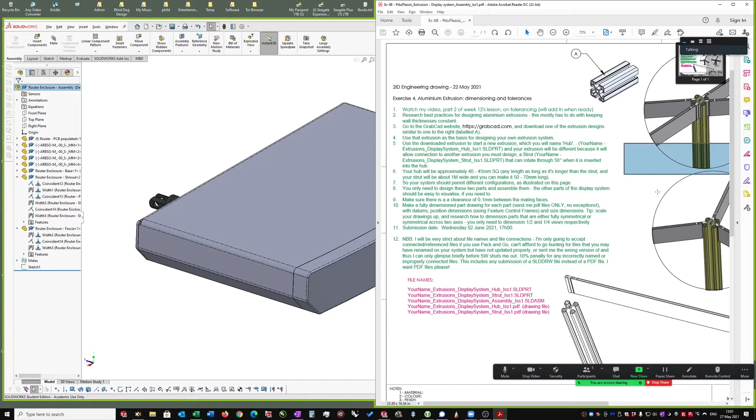In essence, what I'm asking you to do is shown in these 4 illustrations. Let's zoom in. It's essentially an extrusion which is going to look like this, similar to the one you've got but a bit simpler. And then another longer extrusion of about 1 meter, which looks like this long one here.

I want that round end to slide inside this round end, or round depression, in the 4-cornered extrusion, and then be able to rotate from left to right by 50 degrees. So we're designing the meter-long piece, right, and the extrusion is the one we get from GrabCAD?

No, you're designing them both. I'm confused as to which part we're getting from GrabCAD. Well, you're going to go and grab something like this - you don't have to, you can ignore it if you want. It's just easier, I thought, to grab an existing extrusion. It's almost the same size as what I'm looking for, and it's got the basic arrangement.

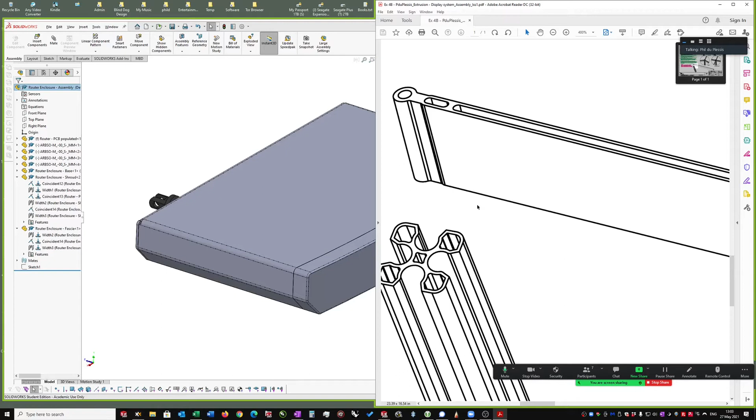You can then use that to grab a sketch off the end of this piece and use that sketch to create the sketch for this extrusion, because extrusions are just basically flat sketches extruded - there's no modeling to them, they're just sketches which you extrude. Do you understand what I'm getting at?

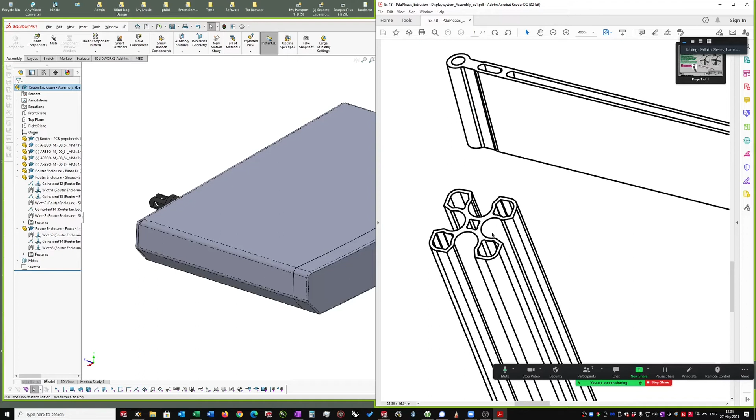Yes, that makes a lot more sense. So we can make them whatever shape we want if we don't get them off GrabCAD? Yeah, kind of, except I want this to be radially symmetrical. I'm going to want these pieces to do what I've asked for in these illustrations.

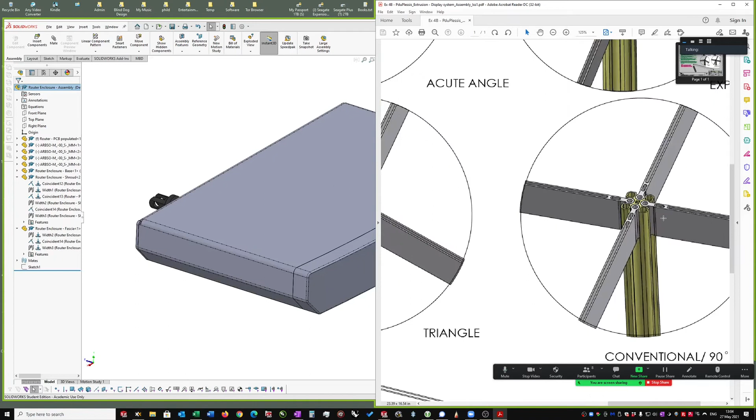I don't know if you can see this first illustration here. I'm going to want these pieces to be able to be arranged in an acute angle arrangement, a 90-degree angle arrangement, a triangular arrangement in which you leave one of them out, or anything in between those 3.

So I'm setting a bit of a challenge for you, instead of just slotting extrusions into a straight extrusion. It's sort of like a hinge. Yep, it's a hinge. But it's giving you options.

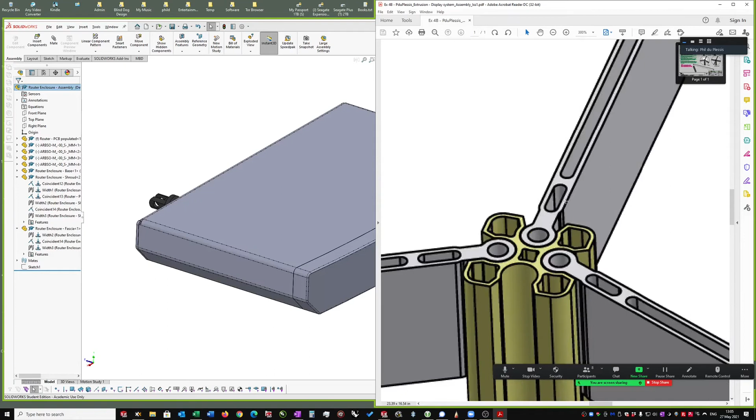What this would have is you'd have injection molded caps, or some sort of cap which you'd insert in this place, which would lock everything into place, top and bottom. Then you'd be able to insert your screen into those slots. I haven't visualized the whole system because I don't see why I should, and because I only want you to deal with those 2 pieces. That's it.

And then obviously I want you to apply the tolerancing procedures that I outlined in my latest video. Okay.

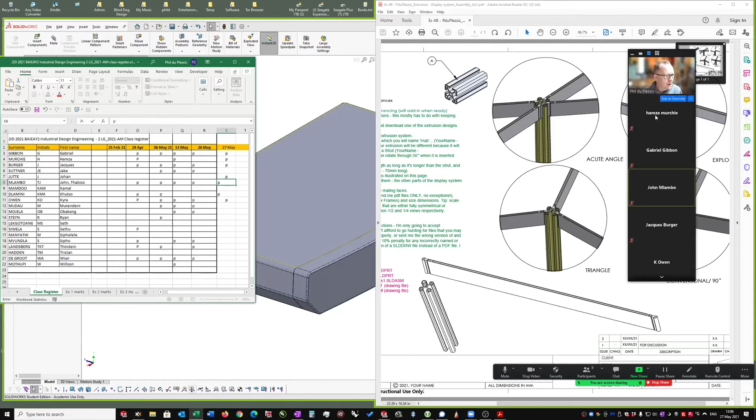Any other questions about this brief?

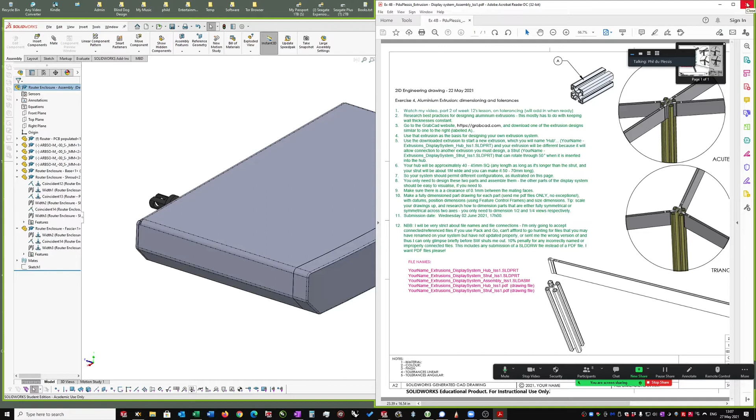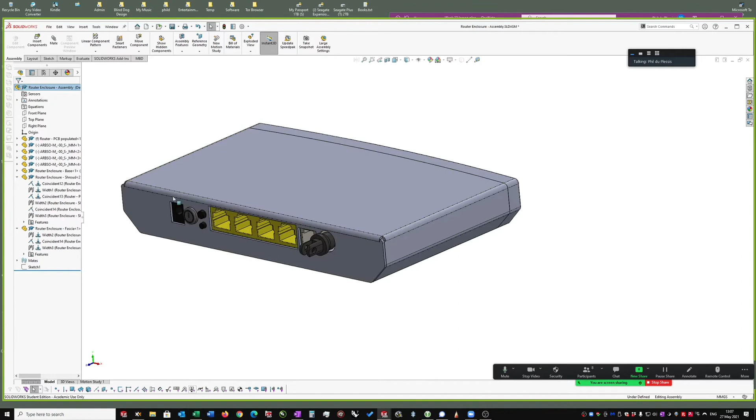Okay, so we're going to be dealing with sheet metal today, and this is essentially what you're going to be designing for me for your last project. Next week is our last session together, so between this week and next week, I have to teach you everything I can on sheet metal that's relevant to this project. Don't worry, we're not going to start with this, we're going to start with something simpler. Let me just maximize.

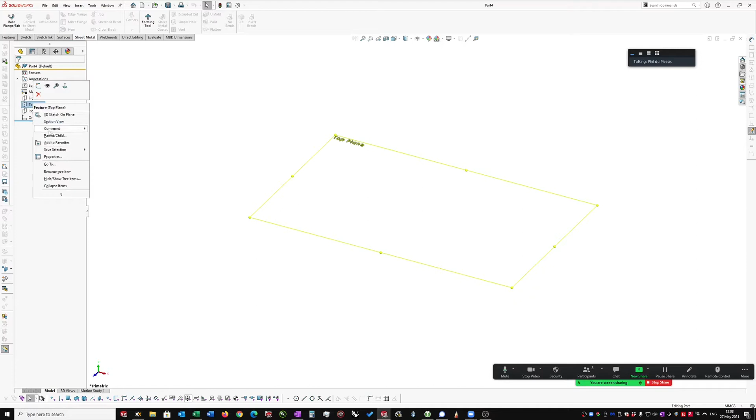Paper aeroplanes, okay. So I'm going to start from the beginning and just assume you guys can stop me if it's too basic. Just stop me. So I'm going to start with a sketch on the top plane, and I'm going to try and keep this very, very simple in the beginning, just because it's going to get a bit more complicated as we go along.

So I'm going to start just with a square. Let's make it 100 by 100, and then exit that.

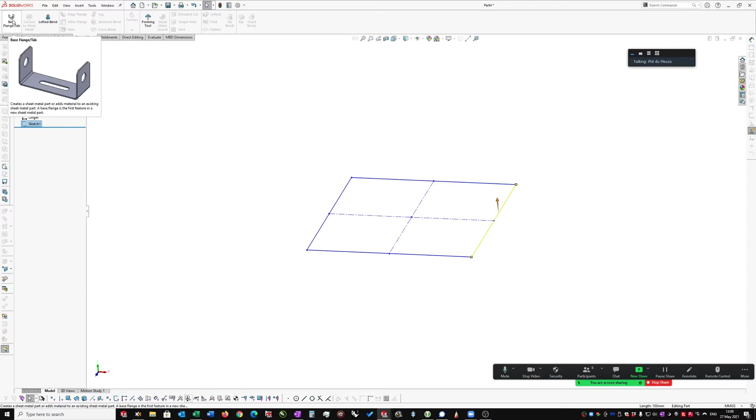Okay, so this is the very most basic approach to sheet metal. There are other approaches, we'll go through them in a while. So I'm in my sheet metal tab, and you'll see across the top that there's the base tab, which is what you always start with, unless you're doing something else, which I'll get to in a moment. And then the second one you use, hidden at the moment, is edge flange.

So base flange, if you click on this tab, you'll get on the left hand side a number of options. One, you can use a gauge table. I'm not going to go through that now, but just be aware that there are tables available. If I click down here and say bend allowance millimeter sample, you can actually set up your own table and go and select your gauge from that. Gauge just means how thick the thing is, so gauge is one of those words which, like a 1 millimeter gauge, isn't actually 1 millimeter, it's 0.97 or something. So instead of using the gauge table, I'm going to type in the thickness, here I'll type in 1.1.

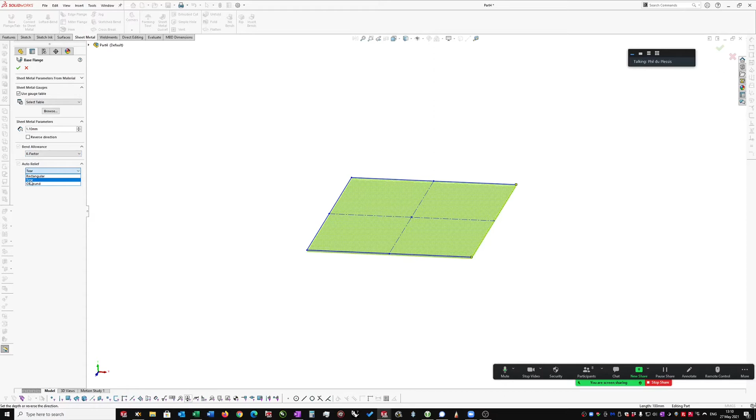You can reverse direction as always. And then these other things, K factor, I'll explain in another video, but it's essentially a way of figuring out how the bend is going to work. And then relief, you've got three kinds: rectangular, tear, and Obround. I'm going to leave it at tear at the moment and click OK.

Right, so basically we've got a piece of sheet metal at the moment, just a very square one. From here we can put in edge, basically it's going to be edge flanges. So this command over here, I've got it in a set of commands, I like to have it over here.

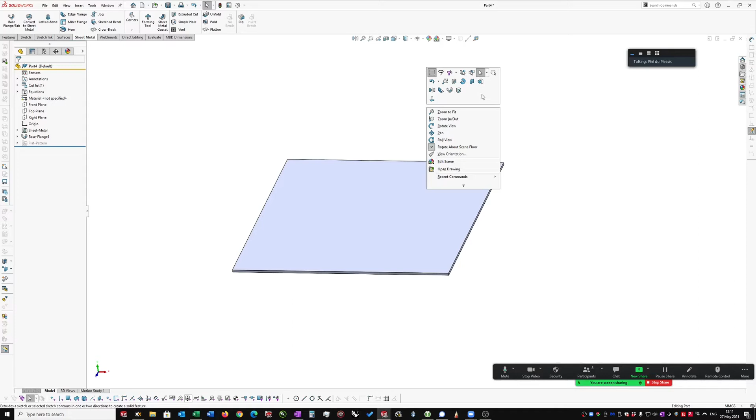I also like to put it, because I use it a lot, in this pop-up. So I'm going to go to edge flange, and from here I can select as many edges as I want, and I can drag up. So once I've dragged one up, I can select another one, and another one, and another one, or I can leave one out. You should be able to see in this little tab on the left, you can right click and delete any one of those. So let's just leave it as 3 for now.

Then a few things to know on the left hand side, let's go through these one by one. Here I've got this use default radius. Now the default radius normally follows the same as the thickness of the object. So if I've got a thickness of 1.1, you can see it's defaulted to 1.1. I can click on that button and say no, I want that bigger or smaller. When you're manufacturing, you basically stick to the bend radius being the same as the metal thickness, but that is available to you. So I'm going to go back to 1.1.

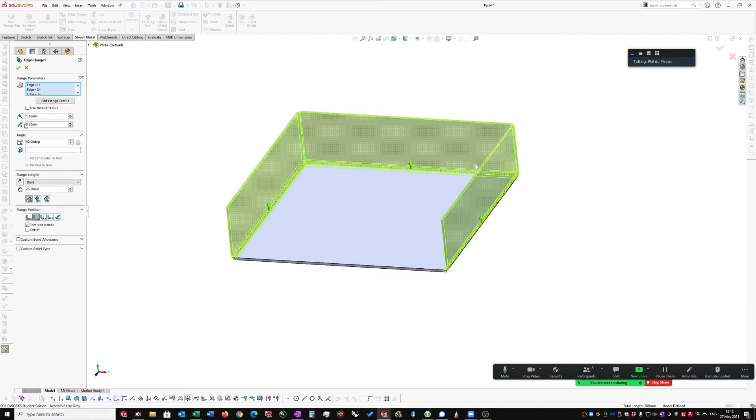This is the gap distance, that's the distance between the two edge flanges. So I can make this bigger. Let's just make it bigger, and you'll see it grows. Let's make it 0.5 for now.

And then the angle, I can alter this. Obviously, if I click on that, you can see they're angling in. Or I can type in, I want them to angle out by 70 degrees. That's what they're going to do. So 90 degrees, let's go back to that.

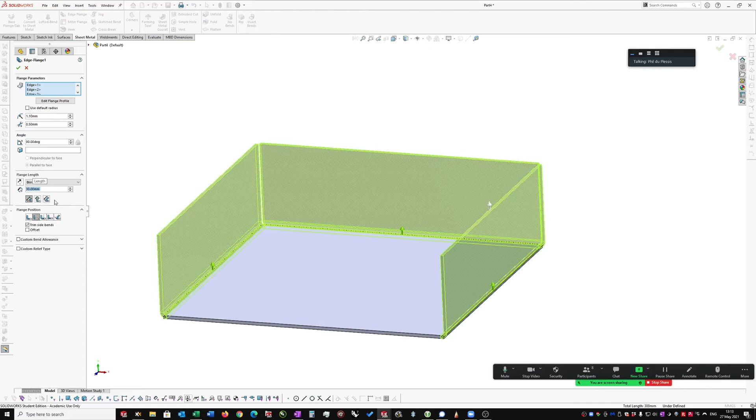Okay, so there's a lot you can control in this feature manager tab on the left. And then the length, that's just how high this is. So I can make that say 100, off it goes, or I can make it 30, whatever it is that I want. And then these three commands here, the outer virtual sharp, inner virtual sharp, and tangent bend, just tell you where that bend is going to start from.

So if I zoom in here, you can see the bend is starting from what it's calling the outer virtual sharp. In other words, where that line there and that line there meet would be the virtual sharp, which it calculates as being half the thickness.

So if I go to the inner virtual sharp, doesn't seem to have done anything. It will have an effect. Okay, and then the next one, I've got to figure that one out.

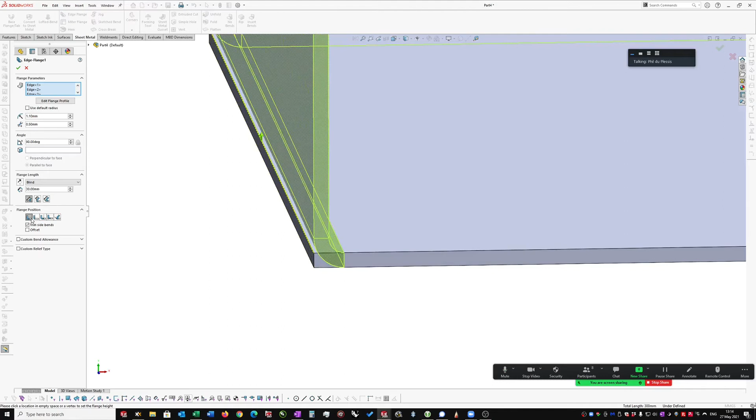The next one is the flange position. This will have an effect. This will position the flange either right, sort of on the end, or inside, so that you can see that that face there is matching this face here, that little face there. So this is the standard one, which is, I forget what it's called, material outside.

There's a kind of a ratio here, I think it's about half. I think what it is, this inner face matches that outer face. And then here you can actually determine, well, that's like popping it onto the end of it, but you can also offset it. In fact, you can offset it at any time.

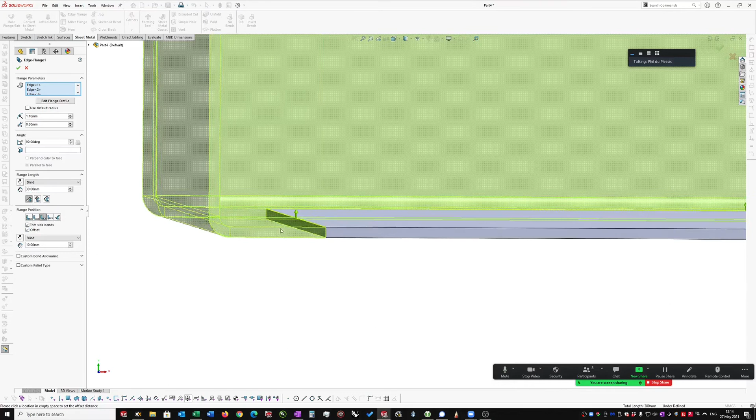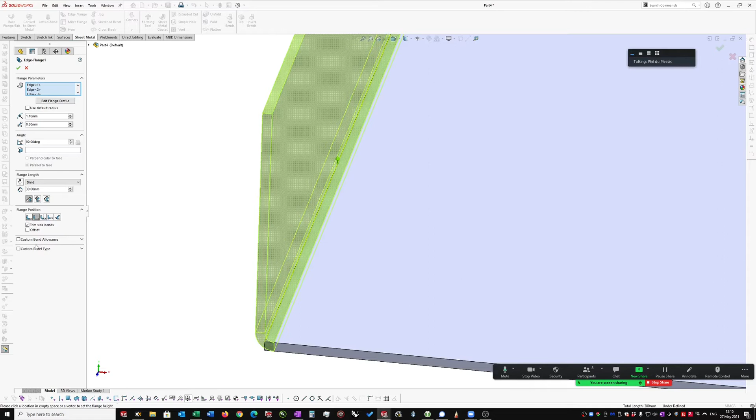So if I want to offset it by, say, 10 millimeters, you can see it's taken 10 millimeters and added it to that piece. So this is all useful to know, because this is going to help you in the way that you design things, because you're going to want to do something along the lines of all of these at one stage or another.

Too complex to explain where you'd use them at the moment, but as long as you know that these could affect your design. And then the bend allowance, that's the K-factor thing. So essentially this is a ratio between the center of the bend, or the center of the material, or the percentage of the center of the material. So 0.4 is like 40% in from that position, so about there. That's where you calculate the most neutral part of the bend.

Because when you bend something, the outer bit of the bend stretches and the inner bit of the bend compresses. So don't worry about that too much, leave it on 0.4. Different materials have got different K factors. And then the custom relief type, there are three of them: a tear, an obround, and a rectangle. So we'll have a look at each one of those.

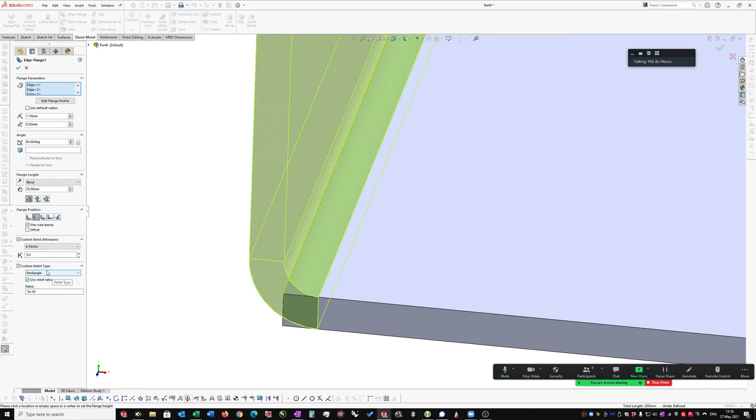So I'm going to leave it on tear for now. Say OK. Right, so let's have a look at what it's done with that tear. That's a tear, what happens there? That's representing what happens with a tear.

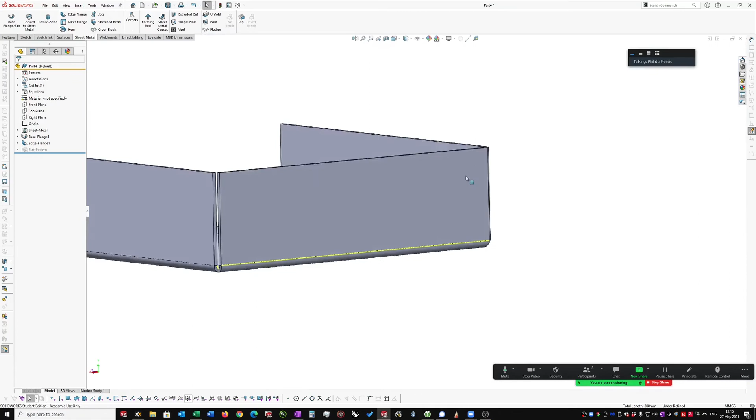And if I flatten this, so there's a command up here. There are three of these commands: unfold, fold, and flatten. Now, flatten is the one that you only use to visualize what's happening with your part. So if you push flatten, it'll flatten it out, and you can see whether everything's working.

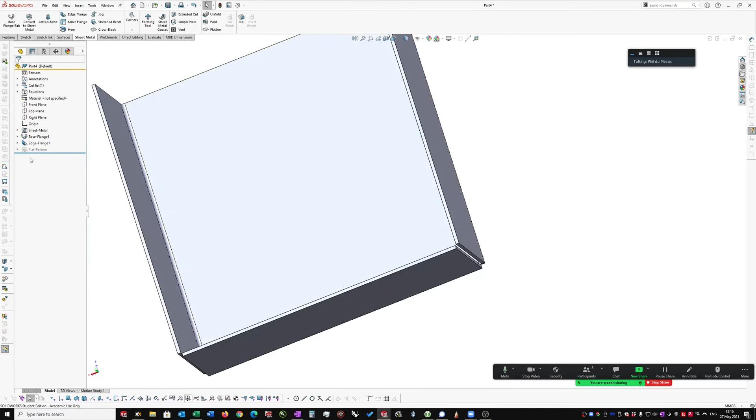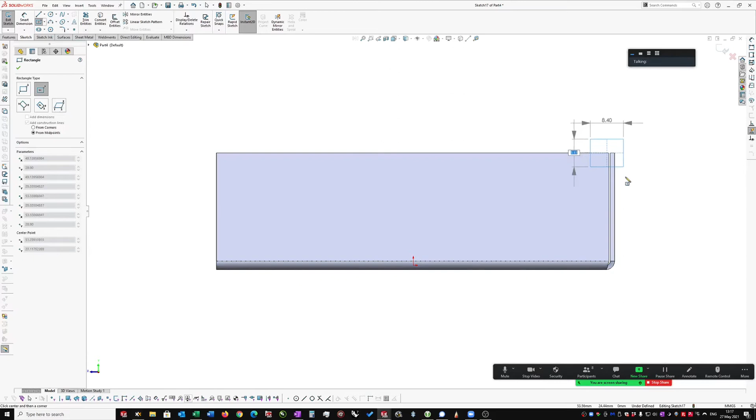Okay, so let's see if we can make this thing not work. I don't know if I'll be able to get it right. Yes, I will. I'm just going to add a tab onto this piece. Not right.

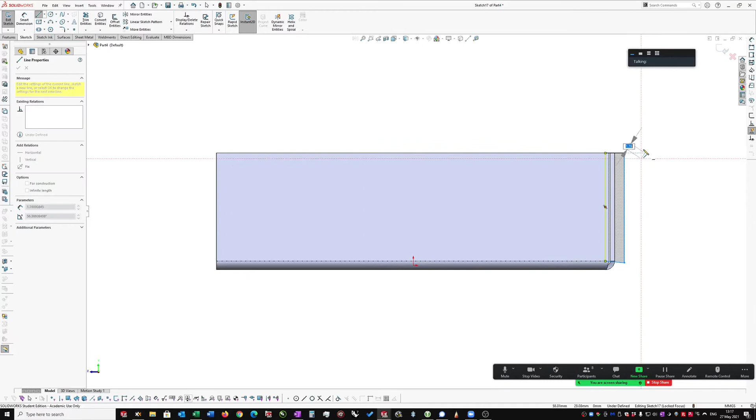Okay, I'm not going to dimension that, just because I want to illustrate something. So you can add bits to your design at any time by just drawing a sketch on a face and then just extruding it. Sorry, not extruding it, but going to base flange, and it'll add it on. It'll actually merge the result. Say OK, and say OK.

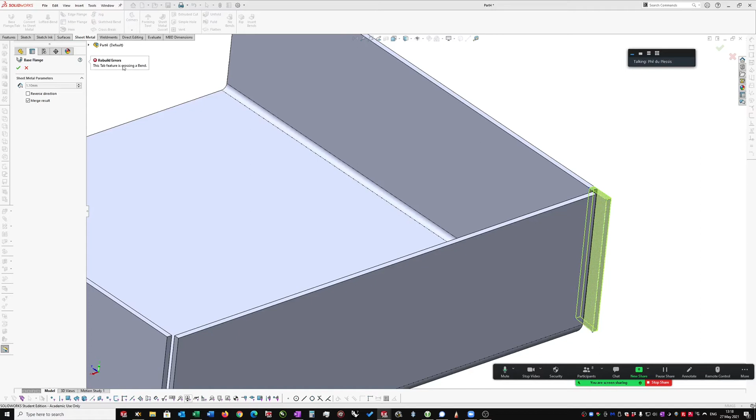It should say, you see its tab feature is crossing a bend. So it won't allow me to do it, because if I were to flatten this, I don't know if I can get this to actually just, I won't do it. So the reason I want to get this object to show an error is to show what happens at the bottom here, especially when we use the flatten command.

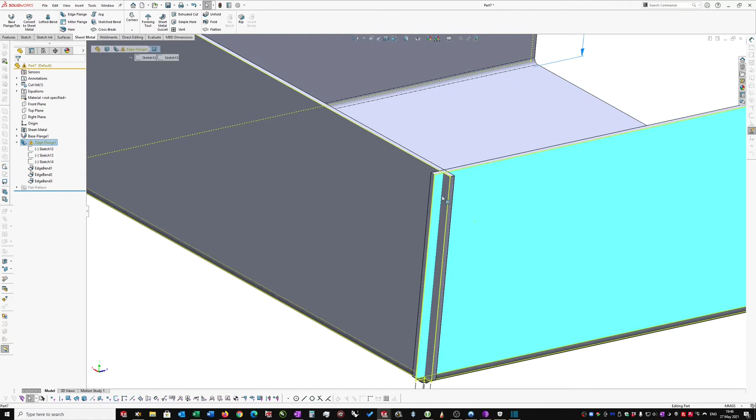The only way I could get Solidworks to do this is to actually alter the sketch instead of adding a tab. So this is what I've done. I've added a little section onto the flange of 1.8 in this area.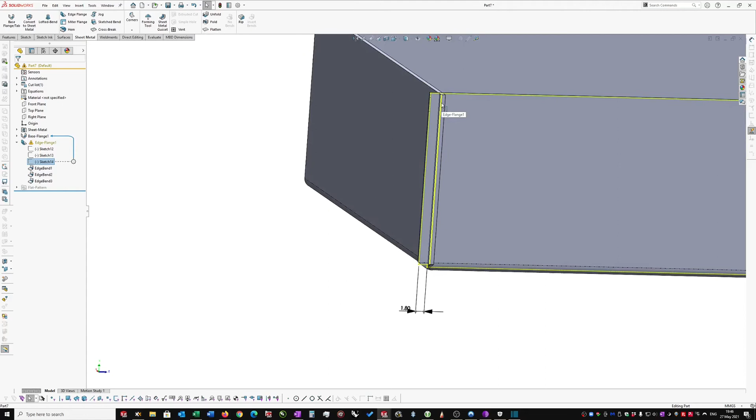You can see there's an error message straight away. And I've done the same with that one, so that now these two parts are intersecting, which obviously you can't bend something like that, so that's an error on its own. But also just have a look at what happens when you flatten.

Flatten will show you, this is a glaring error, but it'll show you where the two parts are intersecting at the flattened stage. In other words, there's no way on earth you could cut this thing, because you've got an intersecting diamond here of material, which is physically impossible.

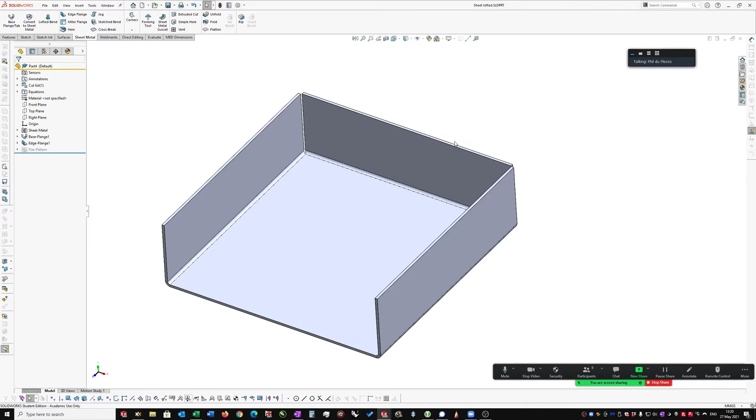Right, so from here, let's just hop across. That's the basic method. Let's go to two other methods. So one way is to loft this shape.

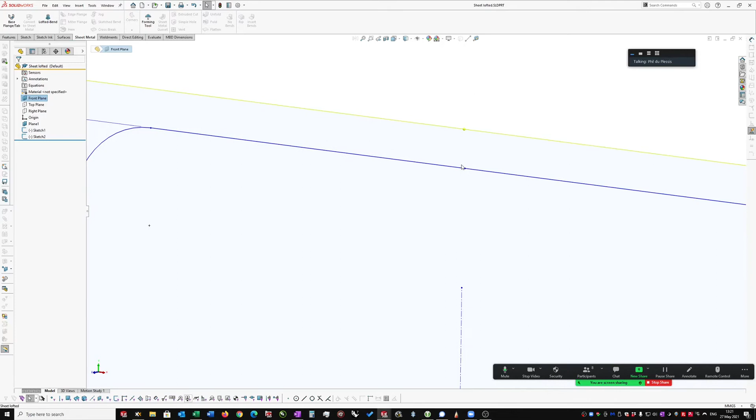So let's say you were doing some sort of ducting. What I've done here is I've created two sketches which are set apart by a certain distance. Just have a look at this sketch quickly - it's not closed, it has an opening of 0.4 millimeters, and this other sketch also has an opening of 0.4 millimeters, and they're in the same place. You could put them in different places, but that's asking for trouble.

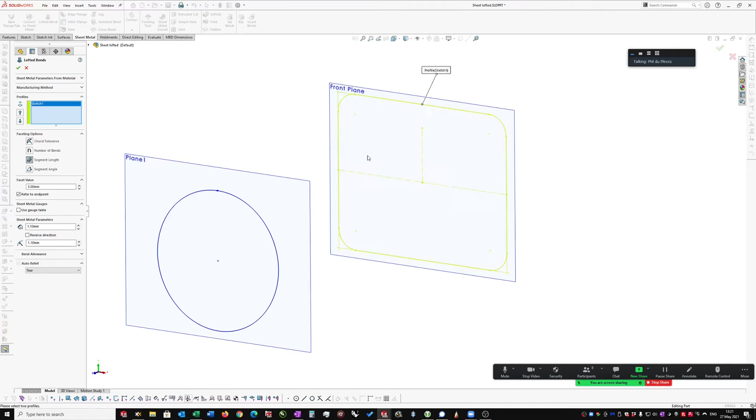So if you've got two sketches like this, you can use the Lofted Bends command, which is over here. You select the one and you select the other, and it lofts the bend for you. You can control things like number of bends, for instance, segment length. I'm not going to get into all of those, but if you've got something complex like this, which can be done, then this is the way to do it.

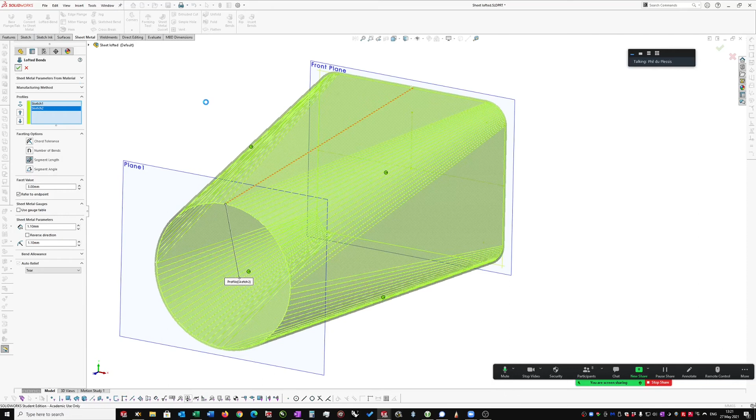So if I were to flatten that - I think the reason it's taking long is because of the number of segments. So that's what it's going to do.

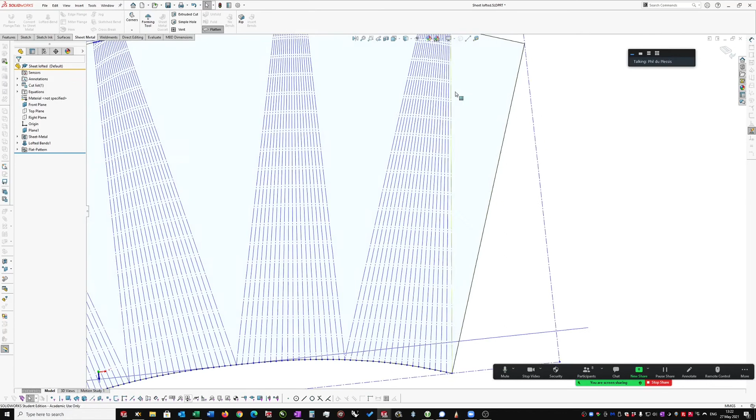Okay, and then just be aware that if you did this, it would mean the manufacturer you're going to use would have to make what are called step bends. So they'd have to make a bend, a bend, a bend, a bend, a bend each time to get this thing to work, unless they had some sort of tool which they could bend the thing around.

But in this one they wouldn't do that. So just be aware that if this is what you want to get done, this is going to cost a fortune because of the number of bends that are required. Each of these lines represents a small bend. So these are called step bends.

Okay, so that's my flattened done.

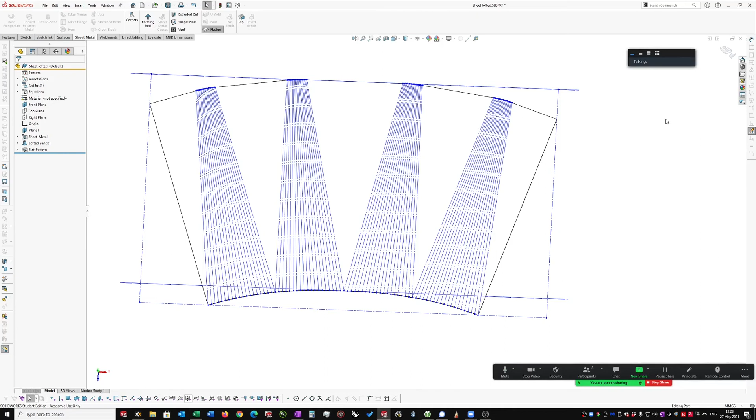I do have a question. Sure, go for it. Go for it, Hamza, I'm listening. I just wanted to ask if you're recording. Oh, I'm recording, yes. Is that what you asked? Am I recording? Yeah, because I like to use the video as reference when I am doing work related to this. No, of course, then I just go back and check. No, absolutely, that's what they're there for. That's what I like - I like this way of teaching very much because it means I don't have to go and repeat myself, you can just watch the video. Yeah, I'm recording, don't worry.

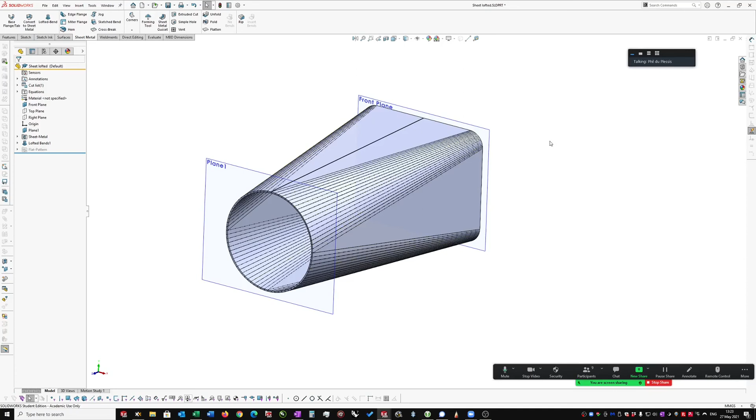Okay, so that's the loft. For now, you're not going to use it, but just be aware that it's obviously a major way of doing things if you're doing complex shapes which you need to loft. Okay, so I'm going to close that.

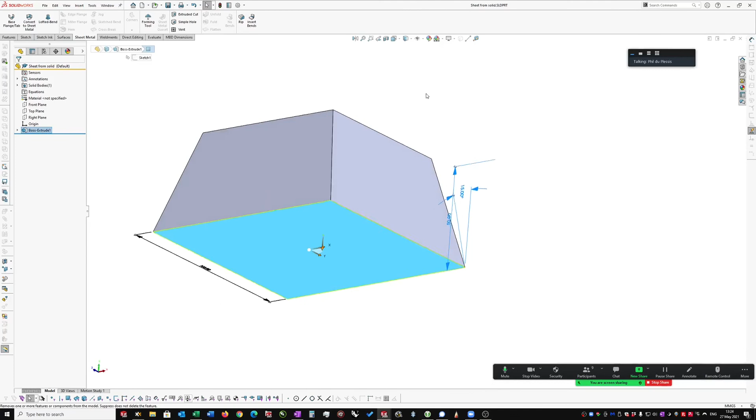Alright, and then one other way - well, there are a couple of other ways, but I'm only going to show you three basic ones. So you can start from a solid and use the solid as the basis for your sheet metal part. I've just got a square base here, which is 100mm square, and I've tapered it up by 15 degrees to a certain height - can't remember what it is. So you could start off with a shape like this.

Just a word of caution, don't start with shapes with corners on them, like with radii. Don't put radii, it must be sharp edged. There are some instances where, like if you had a very large radius, you could do that, but the basic idea is that, depends on what you want to do, but you usually have sharp edges.

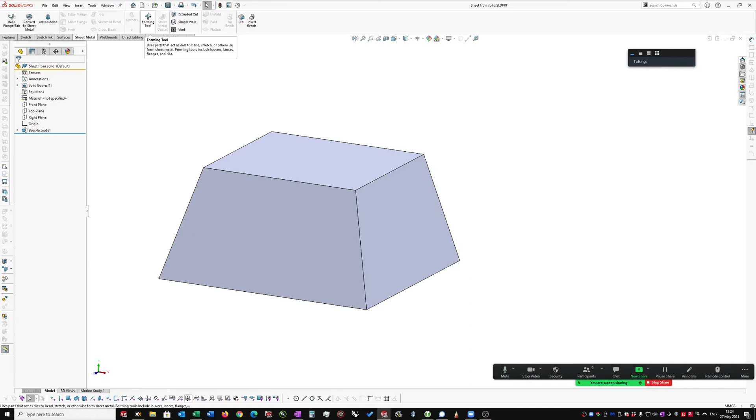So if I go into the sheet metal tab, you should be able to see - where is it? Convert to sheet metal, it's the second command. The first thing you need to do is select the face you want to keep. You'll see along the side here, you can use sheet metal material parameters.

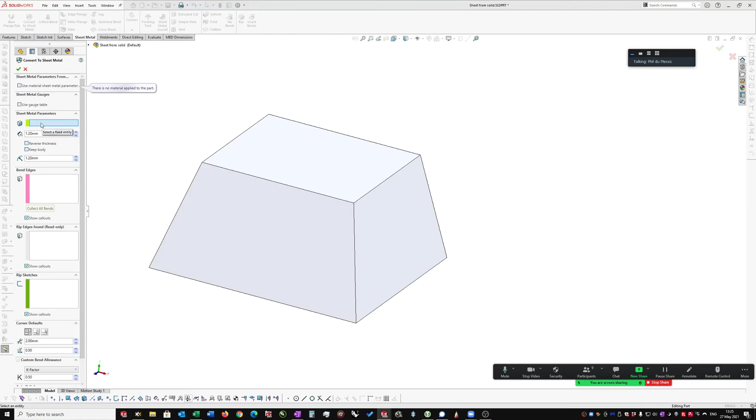You can use a gauge table again, and the first thing it asks for is the base - that's the piece that you want to be the starting point, and then everything else is going to be split according to that.

So then the material thickness, or sheet thickness, I've got 1.2. You can reverse thickness as always. You can keep the body - so let's say you want to keep this body to be used in another part, or you can discard it. And then the bend radius, which is the same in this case as the sheet metal.

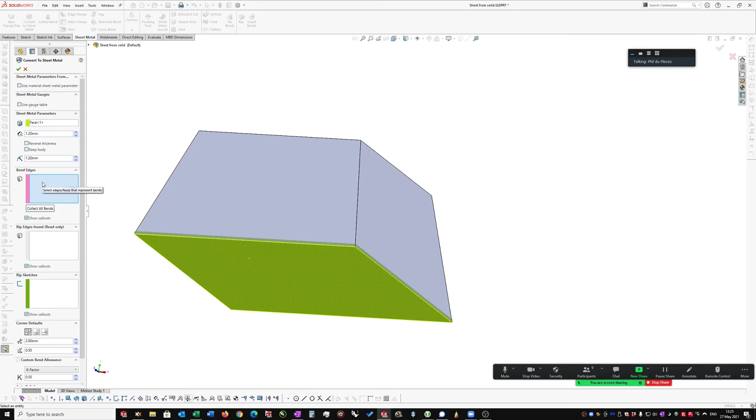And then you've got to select the bend edges. So it's just these 4. Here you've got to visualize a little bit - you've got to figure out where the bends are going to occur. So they're going to be on these 4 corners, 1, 2, 3, and 4.

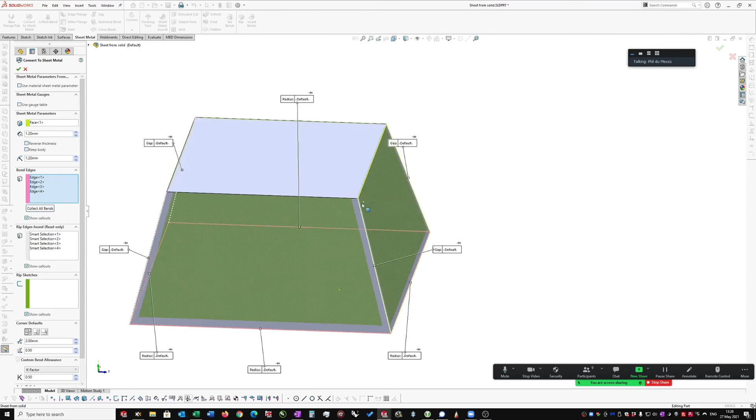And then you see it immediately rips the edges - it's called rip edges. So it immediately decides for you that since you're bending on that edge, it has to rip these 2 edges, creating a gap in them. You can use sketches to do the rips as well, but I've never used that, so I'm not going to go there.

And then at the bottom here, you can decide on what kind of overlap - you can do an open butt, or an overlap. I don't think we'll get a visualization here. No, it won't. And then you can decide on the gap.

So at the moment, that's at 2mm. That's quite big, I'm going to make that a whole lot smaller - let's make it 0.2, see what happens. And then there's an overlap here. Actually, let me see if I can make this give us an error - it might give us an error of 1mm.

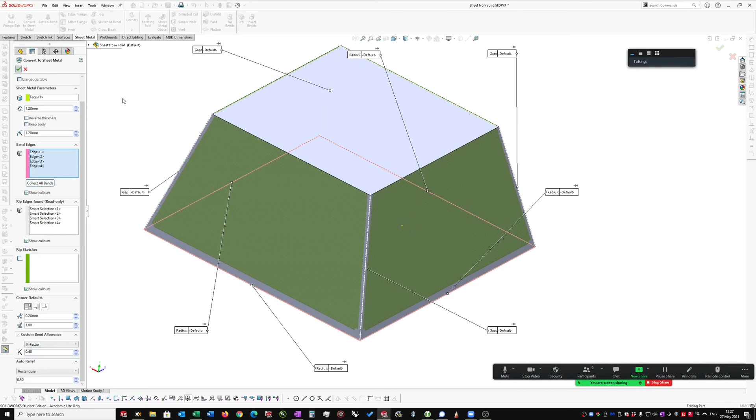So once you've got all those things in place, you can obviously decide on your K factor as well. It's given me 0.5, but I want 0.4. Right, it's done it, and it hasn't given us an error. Damn. Okay, so let's just flatten it to see what happens - you can see it's flattened it.

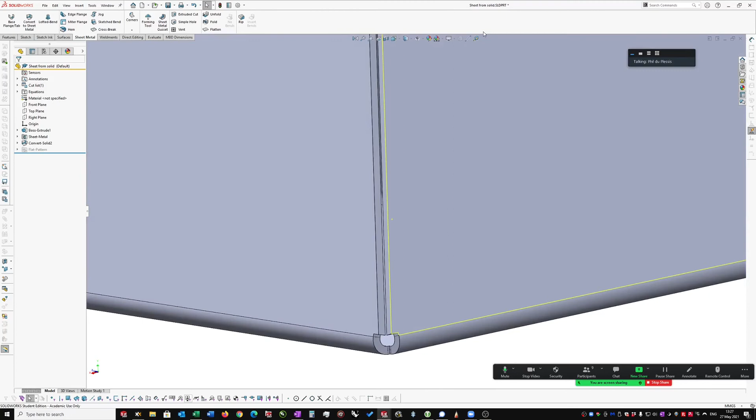Alright, and you can see there's a little gap between those two, so if we were to measure that, that should be 0.2 between there and there. It is 0.2 millimeters. So let's just quickly look at what happens when we choose one of these other ones.

Just have a look quickly at this auto relief - see if we put in an obround, if it'll show us what the obround does here.

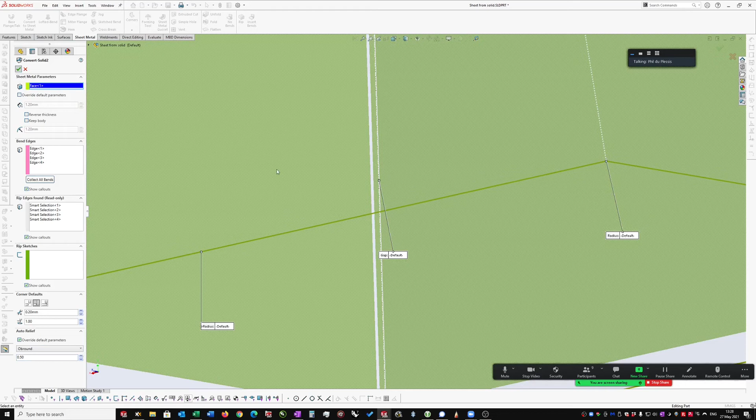Not quite. Okay, but here you can see, it looks like we've already run out of time - another 10 minutes to go. Oh, not too bad. Did someone ask a question? No.

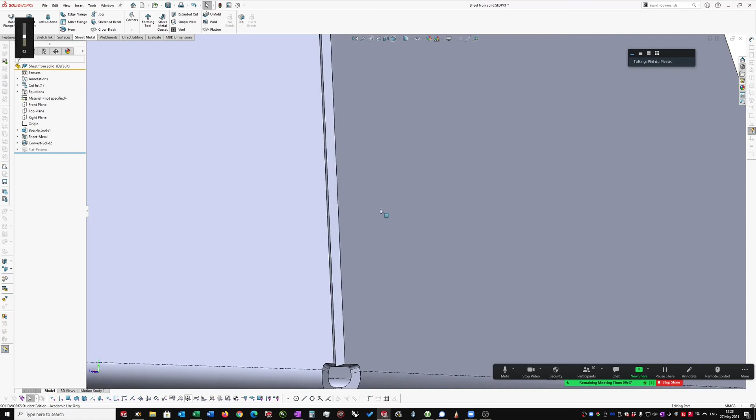Okay, so you can see what happens when I do an overlap, and you can see here that these two don't meet nicely. I know there's a way that you can actually get them to meet nicely as well, but I'm not going to go through it right now.

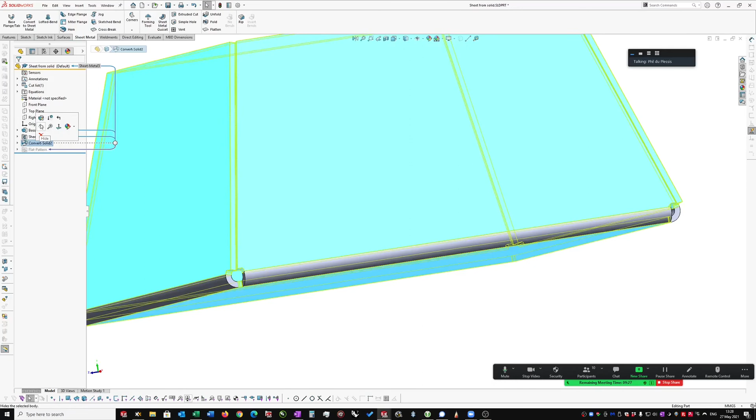I think that basically explains it. So you can see how big this opening is at the bottom - that you should be able to adjust. I'm going to go back to this one.

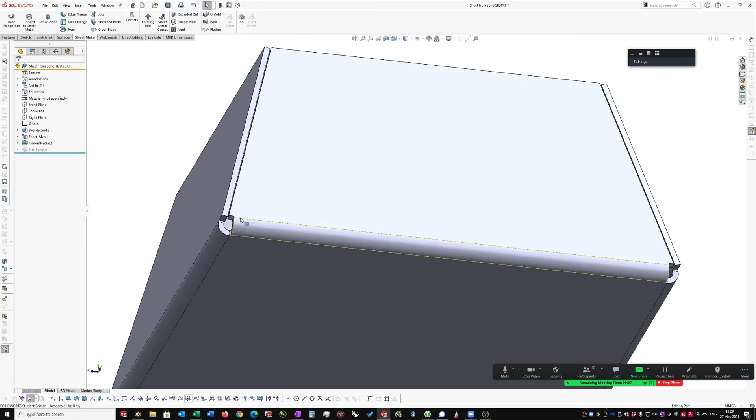Going to that ratio, I think that does it - let's just make sure. No, it hasn't affected it. Okay, right, so I'll figure that one out and just do an edit and explain those things that I haven't explained nicely here.

Right, so those are the three basic methods - there are others. You can do things like put gussets in, which require tools. You can use forming tools as well, and you can create your own forming tools. That's like putting a kind of raised bit in the middle, or even putting a pattern in.

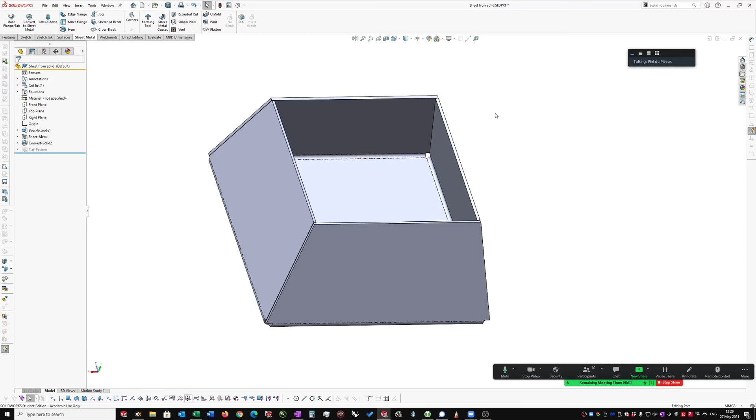Forming tools are like press tools, so it's like injection molding - you have a male and a female, and you press the piece of metal between the two, and it deforms it. But that basically is the three basic methods of creating the starting points for your sheet metal.

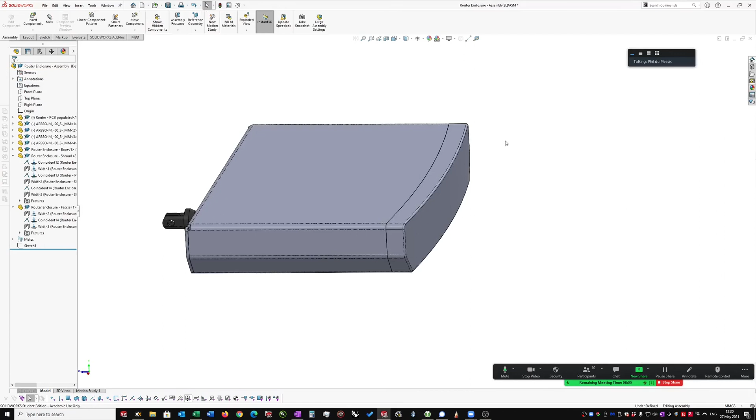All right, so I'm going to hop across to my router, which is this router here. I'm going to open this. Actually, while we've got just these few minutes left, I think I'm going to go back to this one here.

And show you something that I promised to show you, which is configurations. So the configuration manager is this middle one. If you go to the feature manager tree, you'll see your feature manager on the left hand side, property manager where you can change properties, and then the third one is the configurations.

And you'll see it starts off with a default configuration, which is you've always got a configuration. So the way this works is you can add a configuration, give it a name - so I'm just going to say Alt1 for now.

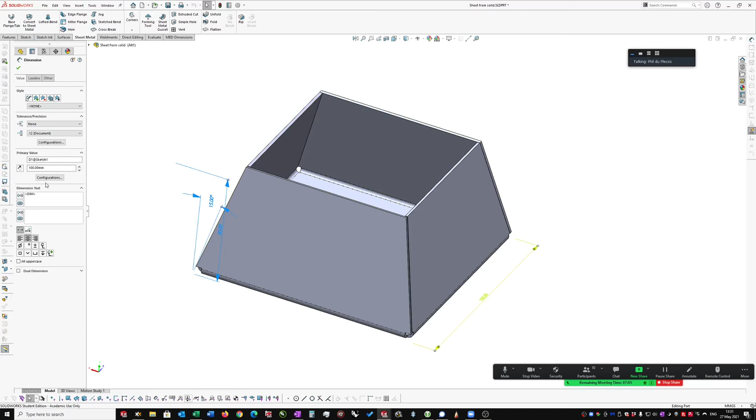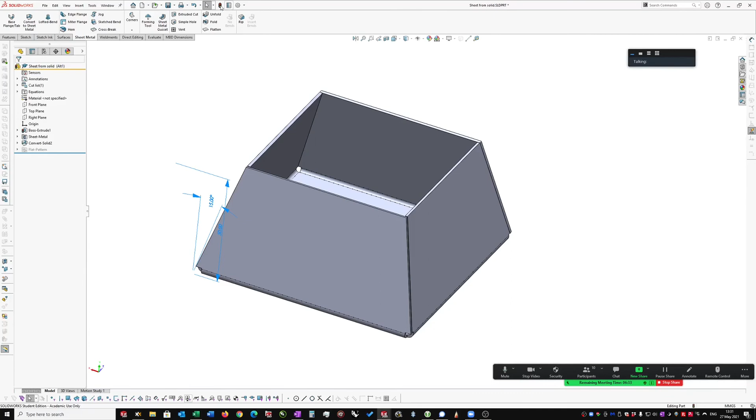If I go back to this part and click on a dimension, you'll see the dimension leader on the left hand side. Just under the dimension you'll get configurations, and you can decide that the dimension you're setting is going to apply to this configuration - the one you chose, Alt1, which is highlighted here, although it's not easy to see. Say OK. So I'm going to change that to 60 or 65. Say OK, just update it. You can see it's reduced the whole thing by 35 millimeters.

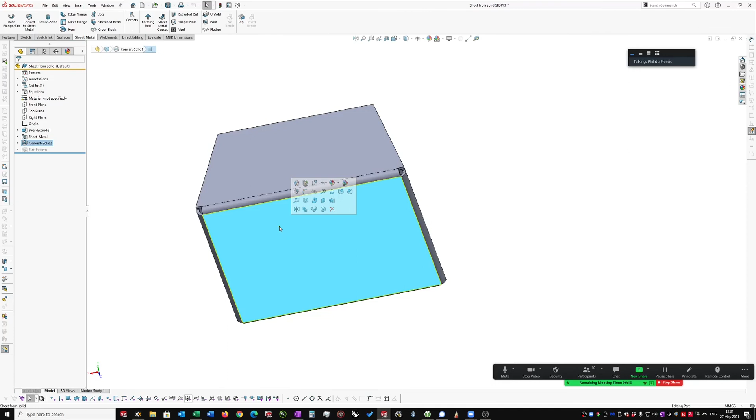If I go across to the default one and double click it, you'll see it enlarges it, so now it's back to 100. So that's at 100. Right, so you can do the same thing with other dimensions.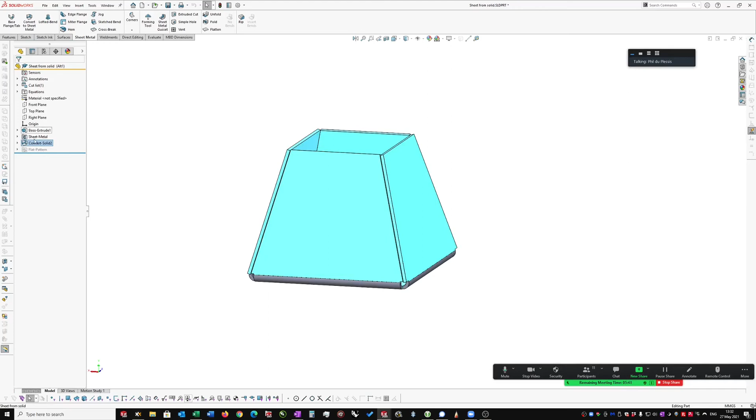Let's rename this default by clicking in it and pulling away - I'm going to call it Alt-0. Let's double click on Alt 1 and say at Alt 1 I want the height of this to be 40. Inside the modify dimensions pop-up tool, you've also got those 3 little blocks which you can click on, and you can say this configuration - I always like to do that just to see that it's going to work. Say OK.

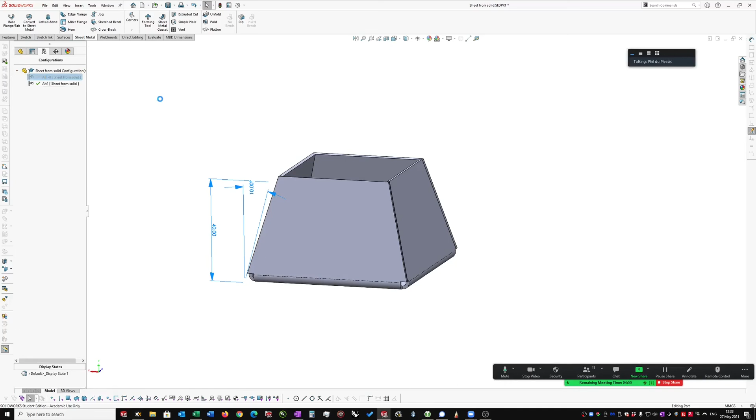Let's do one more. Let's just change this angle, 15 degrees, and in this case I want it to be 10 degrees. Okay, so if I double click on the Alt 0, that's what I get, and if I double click on the Alt 1, it's changed the configuration.

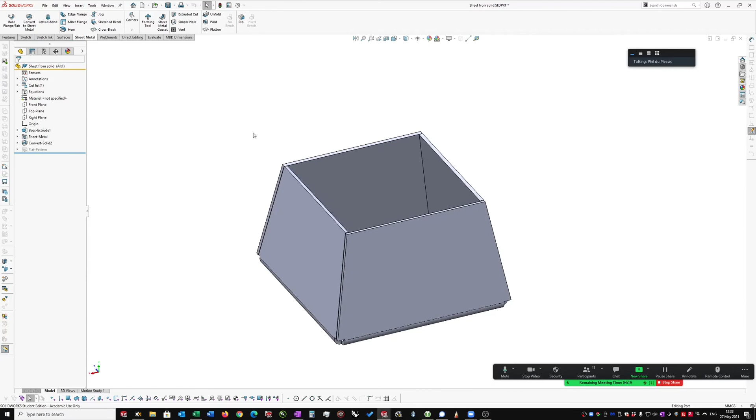So I can have as many configurations as I want inside here. This is a great way to change things. If you want to make minor changes, test something that's 110 versus 100 millimeters with slightly different angles, you can do that. This applies to all your designs - I can't think of anything where it doesn't apply. It also applies to assemblies and to multi-body parts. You can have configurations upon configurations - so you could have an assembly in which you have a configuration that uses different configurations from your part files.

So I hope that's useful. I find it extremely useful. Instead of designing 2 different parts and trying to find them, I can just go inside my configuration manager and just double click on it.

In fact, let's just bring this through into see if we can do this quickly before we run out of time. How much time have we got left? Never know, it never tells me. 13:34, probably about 5 minutes. So let me save this, make assembly from part.

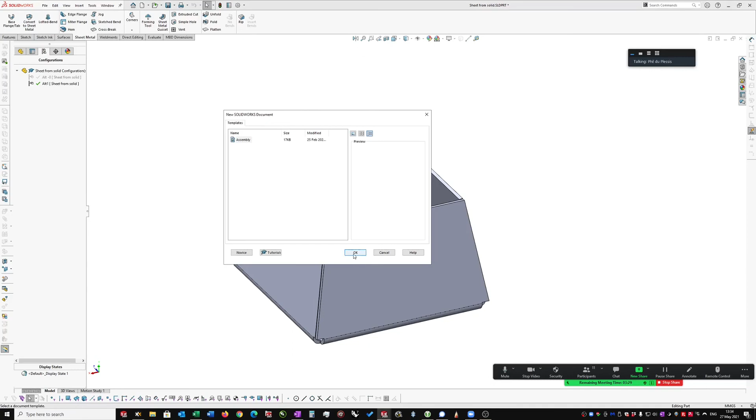Okay, now if I click on this part, you'll see that at the top here, I can specify the configuration, and it'll change it inside the part. And then I can go into the configurations inside here.

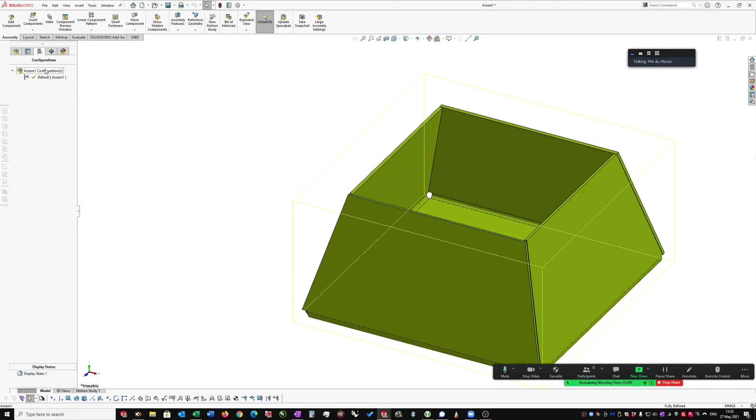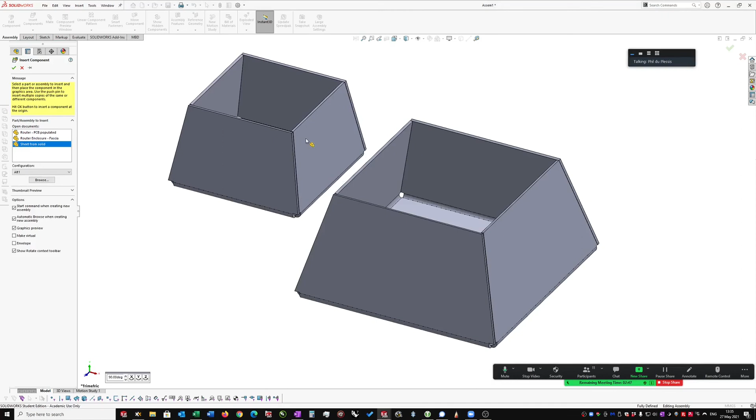Just for argument's sake, let's see if I can bring in a part quickly. Yeah, that's a good idea. Let's bring in another version of that part, and let's mate this to this. And just flip that mate, and just basically do something like this. Let's say that's your configuration, and let's say in this configuration you want the 2 to be equal.

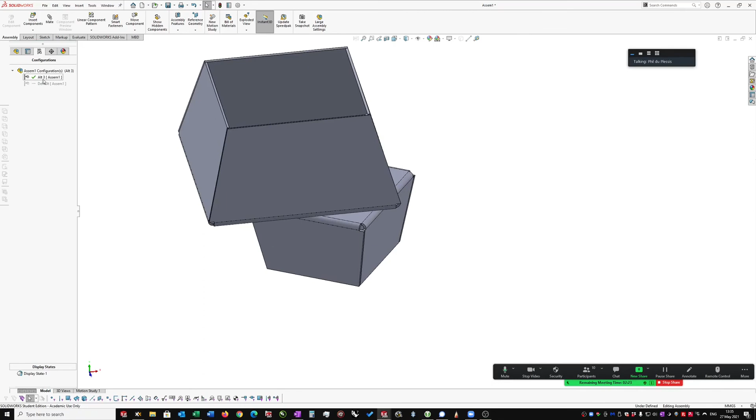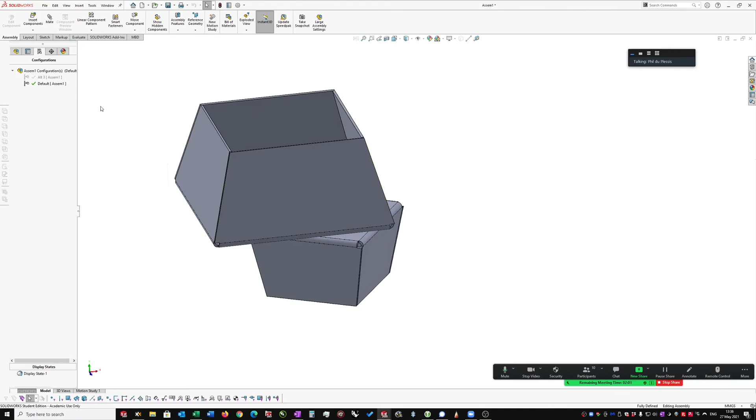So what I'd do is go back to this one here, and say give me the other Alt 0. Okay, so in this configuration they're equal, and in this configuration they're not equal. So that's the beauty of this - you can put things together using configurations in assembly and alter which of those configurations created in the parts that you want to use.

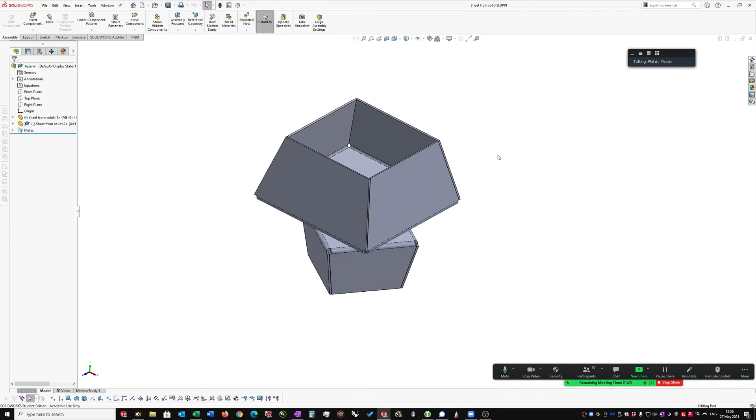Right, so I'm pretty sure we're going to run out of time fairly soon, and if we do, then we'll just continue at 2 o'clock. What have we got? 13:36. So we should have another 4 or 5 minutes. Let me see if I can close this. I'm not going to save it. Close that.

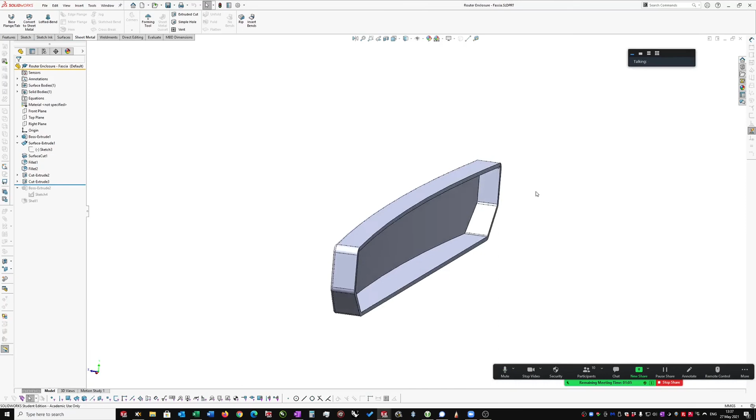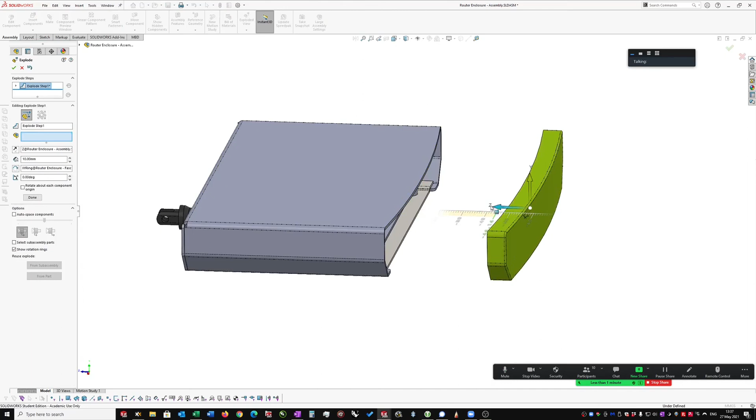Let's see if we can start on what I've done here. I'm going to give you this part as a step file, and then I'm going to give you another part which looks like this - this fascia, which I'll add some ribs into as well. So I'm going to give you those 2 parts, and ask you to create an enclosure which looks like this. You're going to give me the top part, this part which will slide inside it, and we'll deal with that when we come back, creating this jog feature, and then we'll also create some venting on the shroud.